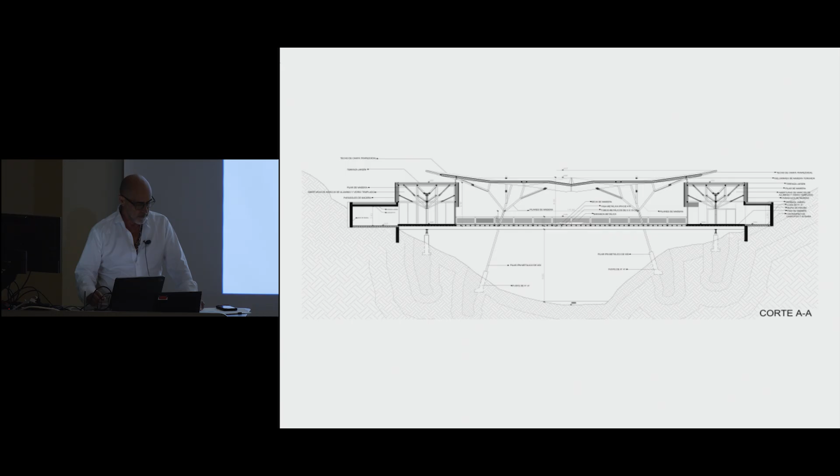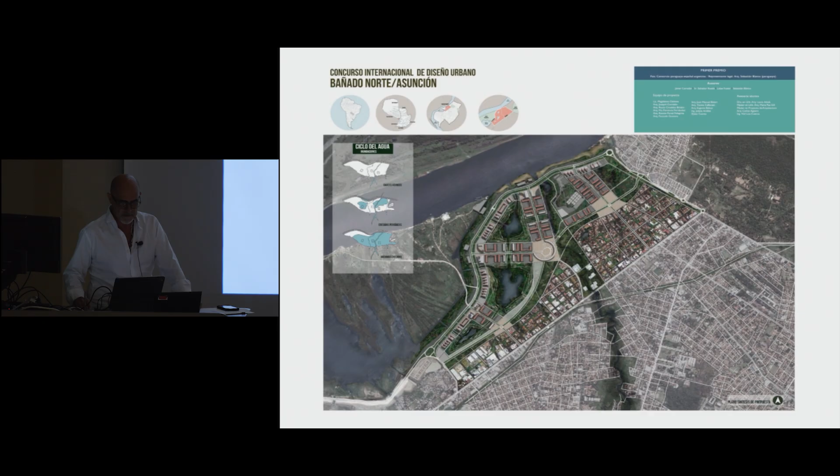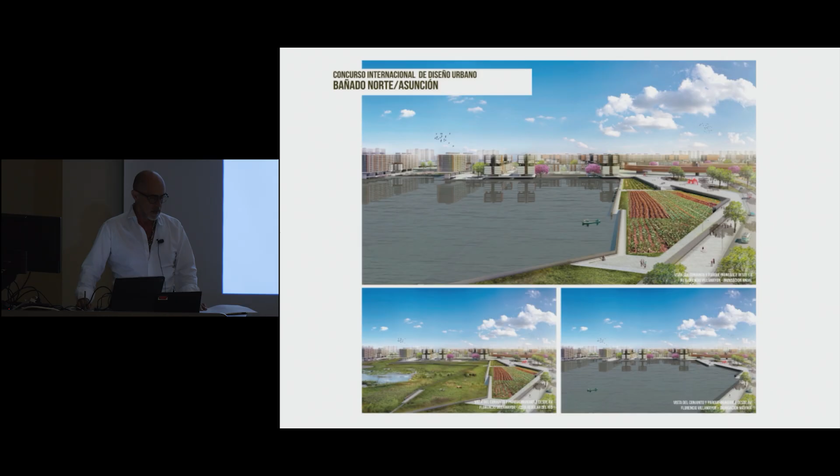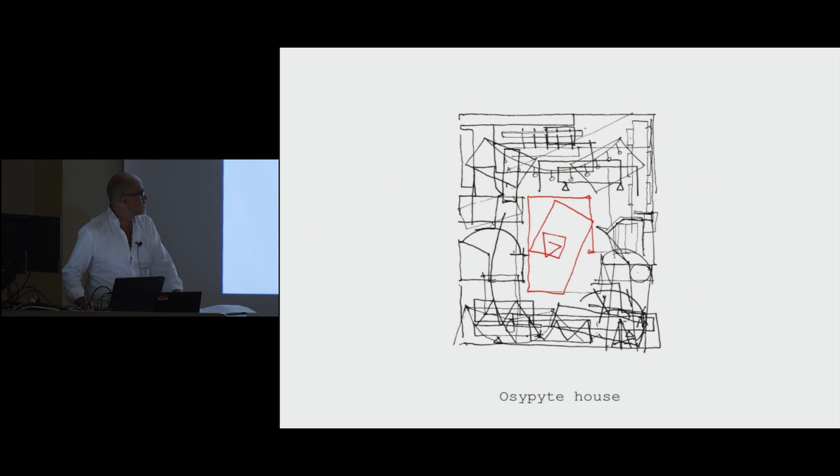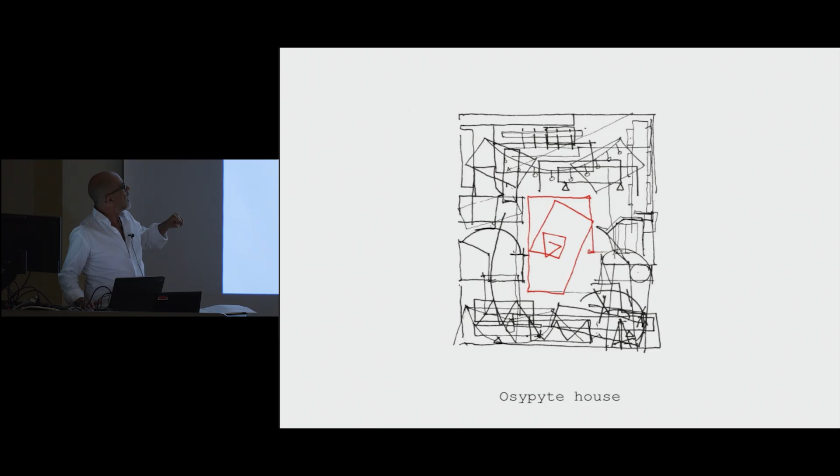This is probably most of the projects and works that we did until now, around 25 or 30 years of profession. So, if you remember one of the first drawings, this is the Osypyte house. This is where I live and where our studio is, the Laboratorio de Arquitectura. This is in the center of the image. And all of the others are the projects that we are going to see now.

Like I said, the tree, this is the structure of the house. A wall of 70 meters without a pillar.

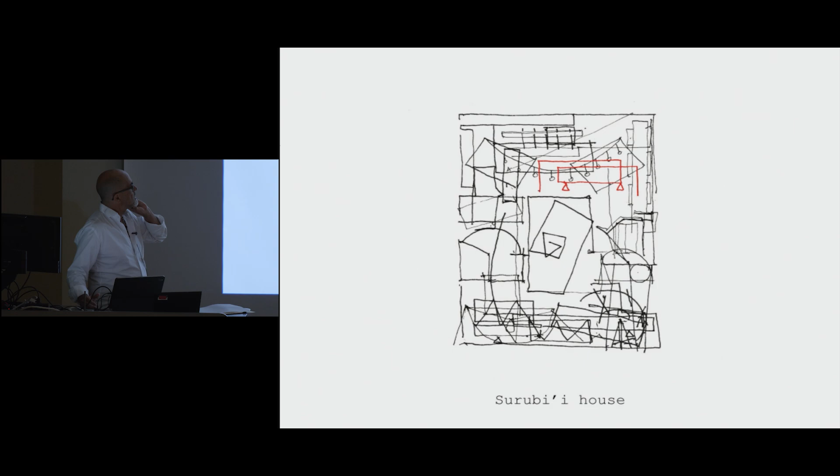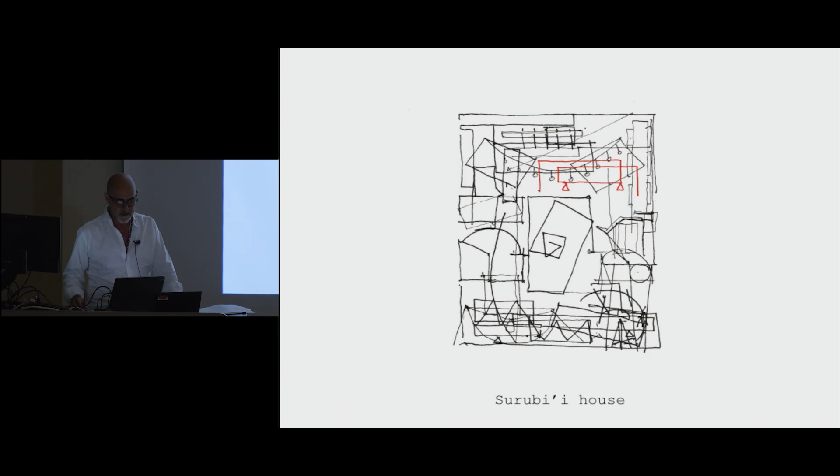Well, this is another house. It's the Surubi'i house. Surubi is the name of the fish, a very typical fish for the Paraguay River. So this house was a house that we thought against how do we think the structure. Just thinking how just a simple beam can work.

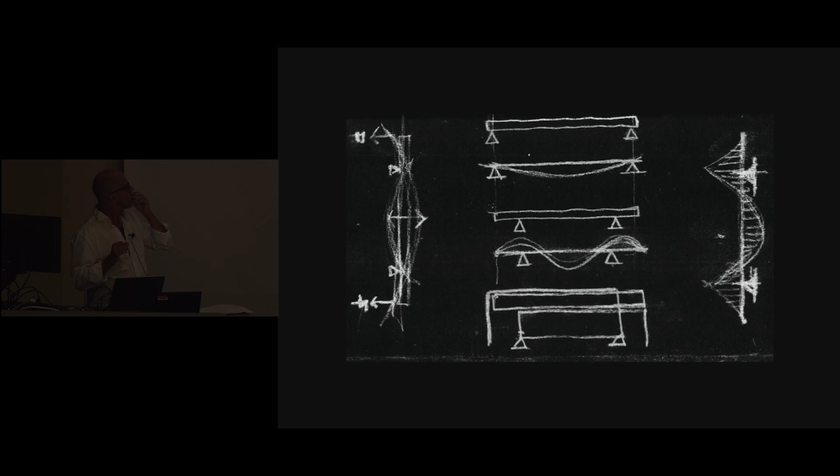You see upstairs a classical beam, and what happened with the deformation of that. But if we take the support to the center, the beam starts to work better. Like this. This is a beam and a weight right on the center. And how it starts. And if the distance between the supports are not enough, we just can put a weight to get the perfect beam for that.

And the weight is the wall that doesn't arrive to the floor, to the ground. This is the main entrance. So you can see here the beam. The support, 4 pillars, and the weight. And this is how it works.

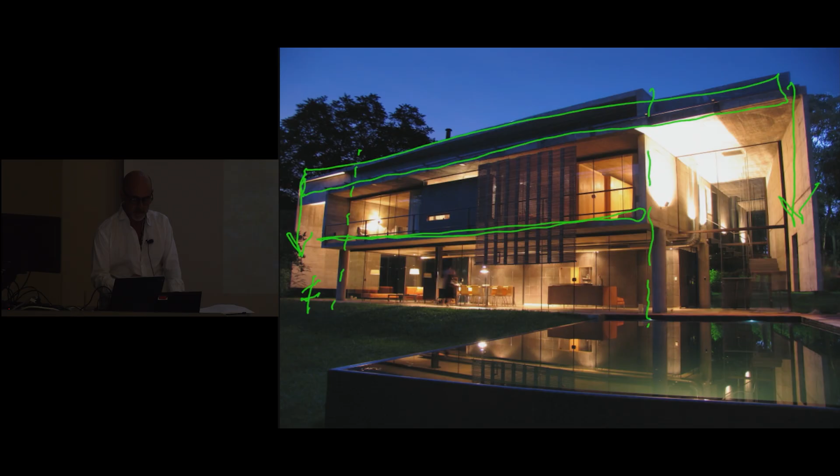All the floor is hanging.

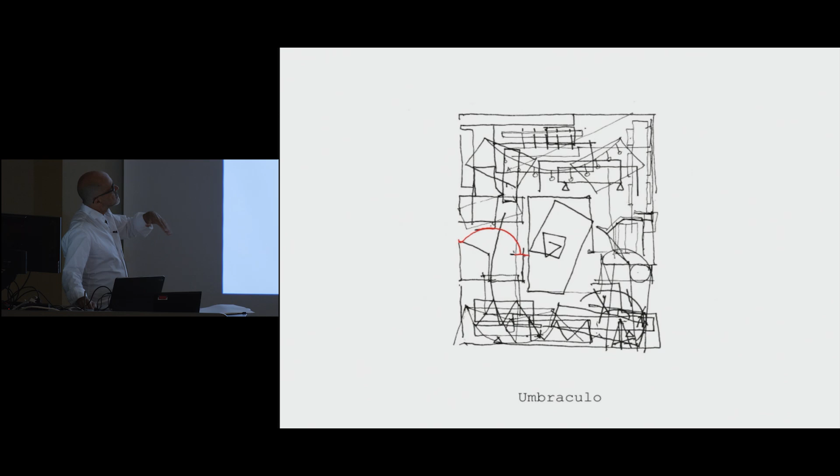Another work. We are going to see very quick, fast, some projects, and then we are going to stop in 2 of them. This is the Umbraculo house. And the problem was just to think how a vault can work.

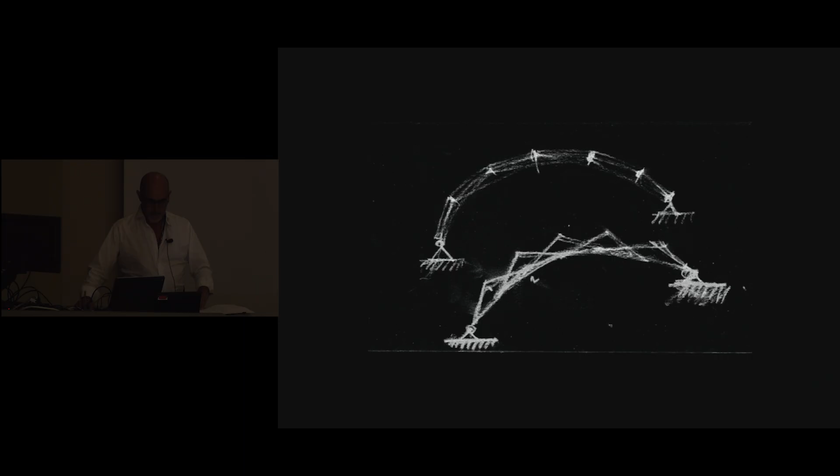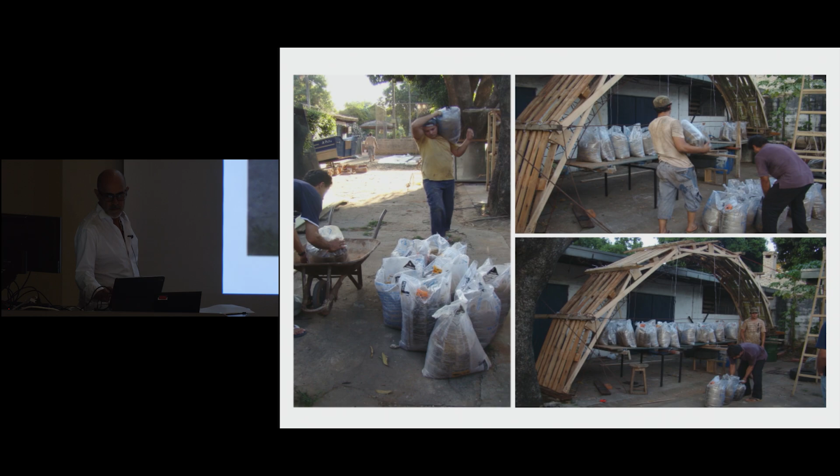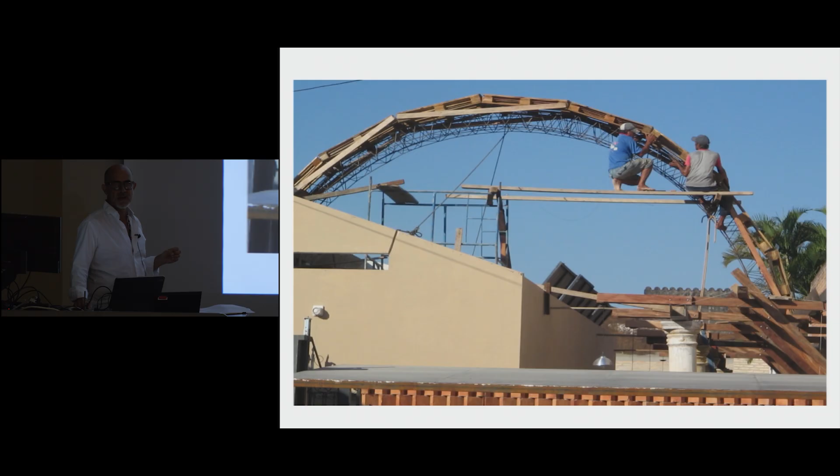But with recycled material. And this is the technique. This was a very old house, a sort of heritage of the downtown of our city. So this is a space that we did on the second level to have a double for the weather and for the sun, just to build a shade.

Filters, double roof. And this wall is black because the owner is a writer. So she can write inside on her wall.

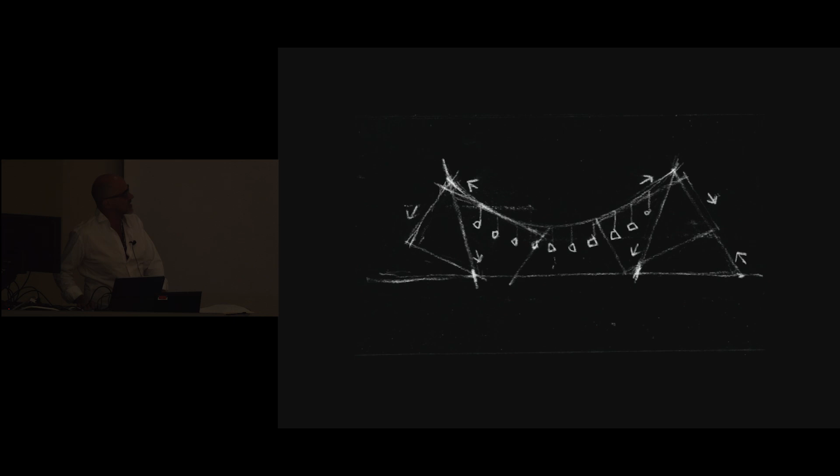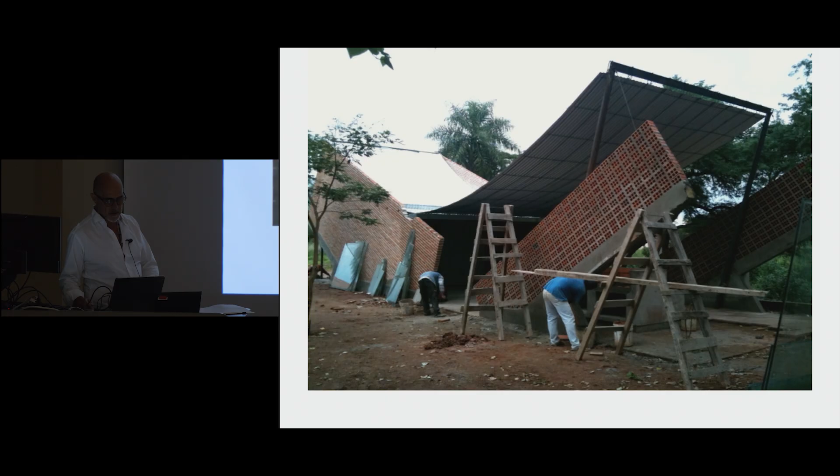This is another one. This is the hammock house. It's a structure for assembling and a surplus of material with construction waste. We have many materials for that. And stones just to give weight for the roof. Very light roof.

The doors are like a garage system. And the most important space in the house, always near the outdoor space.

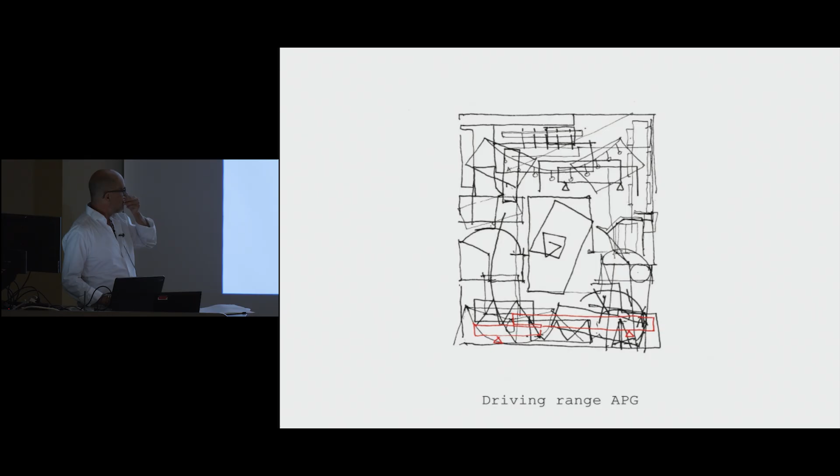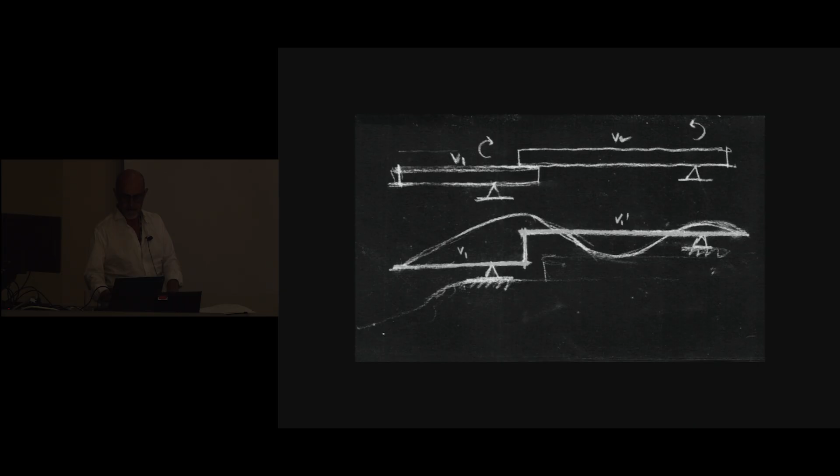This is my son. And this is the idea. And this is how we do variations to know the relation of support and two beams, how can it build different projects? And finally, all the structural calculation to have this. This is the 25 meters of cantilever.

There you have the stream in the dark part, and the topography, the ground goes down. So players can be here. Excuse me, you have one under the roof. Three spaces for the players.

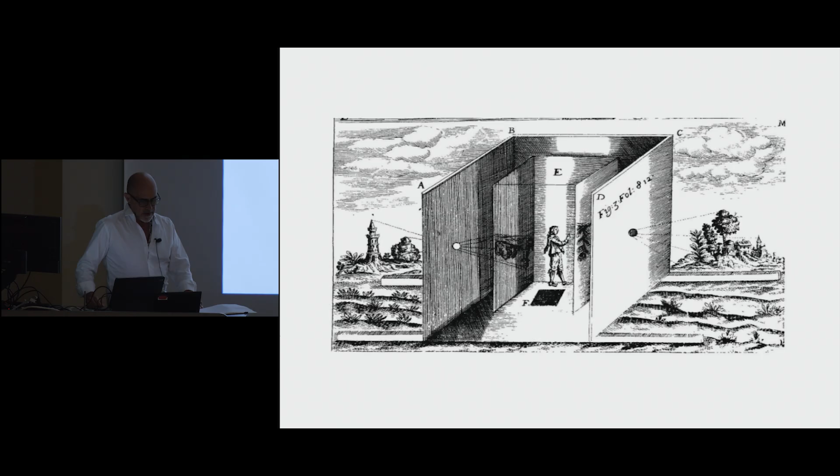Okay, another one, the dark house. Dark house is a pinhole box. Was a house, yes, was a house because now it was transformed into a house for a filmmaker, and how a filmmaker can live in her own chamber was the topic.

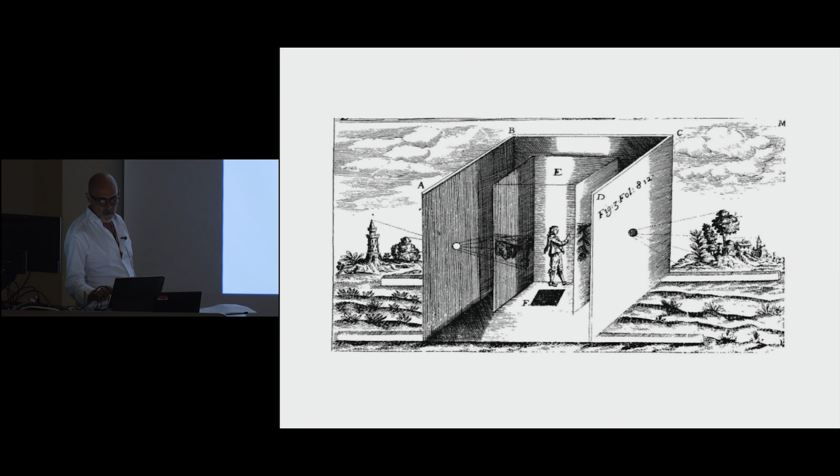This is the very famous film of Paz Encina, the name of the filmmaker. She won a prize in Cannes. This is the way we explain her, because she came to us to ask for a house, since we did the hammock house. The movie was La Hamaca Paraguaya.

We said that she is going to do many films, and the hammock house was not the right house for her. So we thought of another idea. That was our presentation.

We put the hammock, and the image, the projection of that in the landscape where she is going to have her house, was inverted. And it was in this place. These are the plans. It had two levels, and works like this.

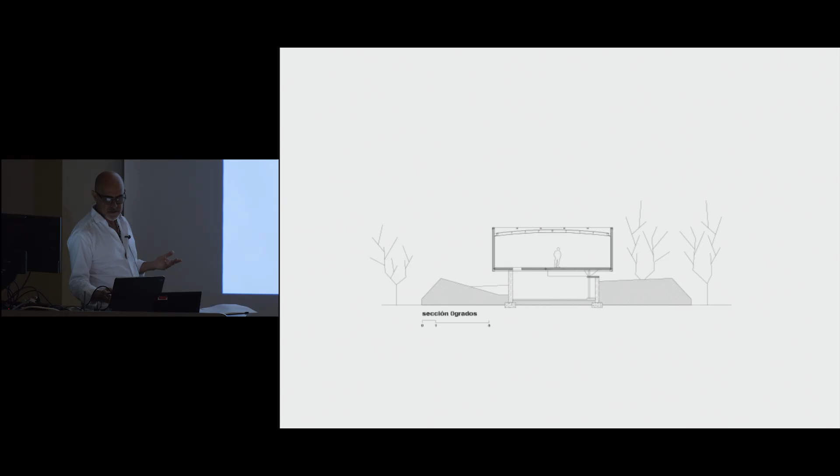When the weather -- why is it a pinhole box? Not just because she's a filmmaker. It's because she was studying in Berlin.

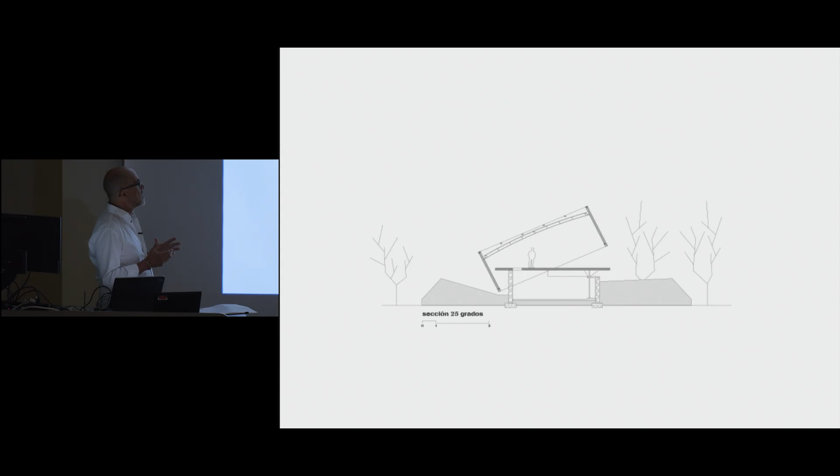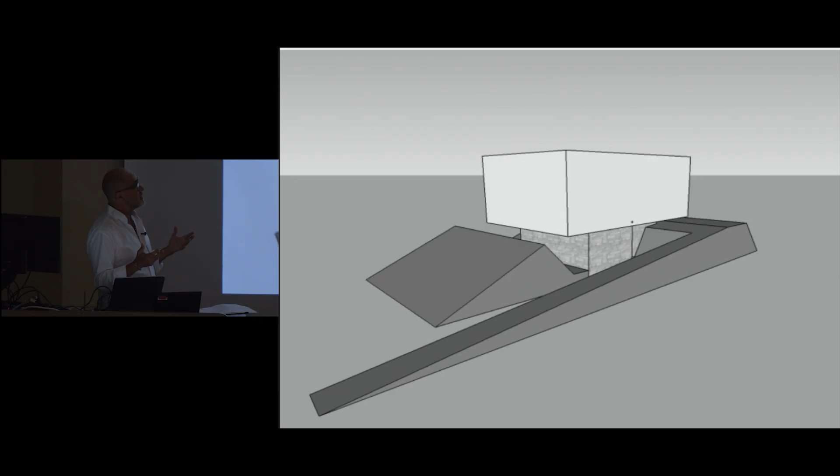She is going to live in this house only two months a year for vacation, so nobody is going to take care of this house. So that was the problem: how to do a house that nobody is going to care for. Also, the budget was only $20,000.

So this was the renders and the explanation of the idea. This is the house already built. She is Pasita. This is how it works when the box is closed -- you can see the outdoor image on the walls, inverted.

So the house is blind, but in some way it is transparent. But it's for a filmmaker, it's not for a lawyer. And this is how it works.

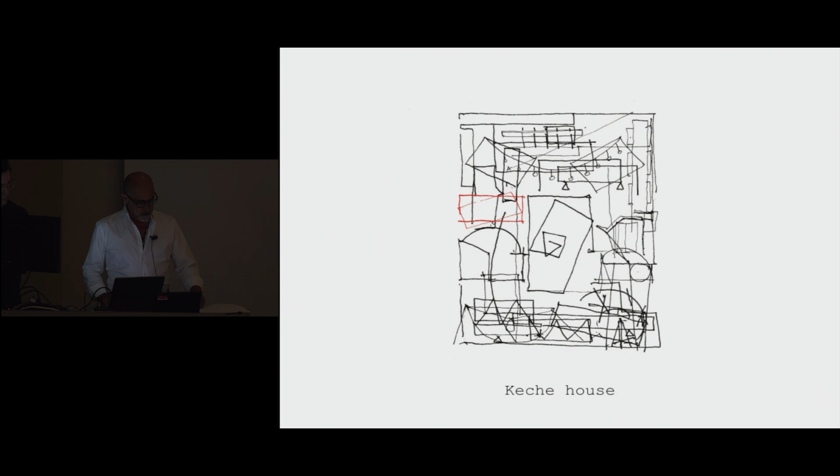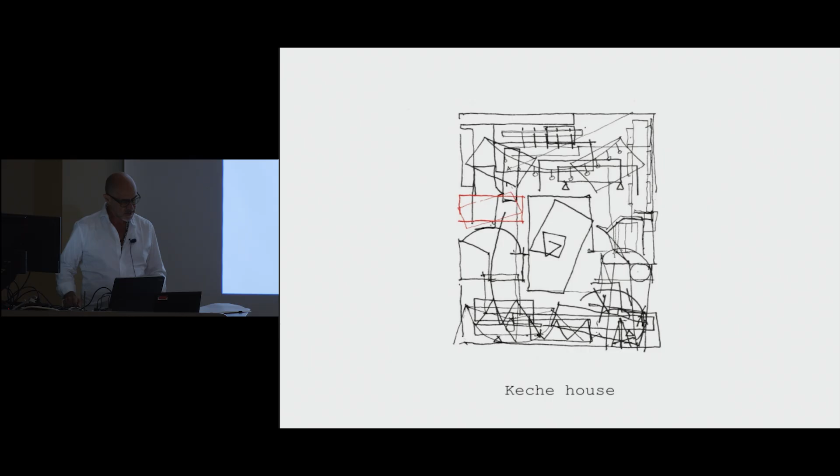Okay, the Keche house. Keche house means crooked house. Why crooked? There is a story behind this. As you know, Saint-Exupéry is the famous writer and pilot who invited Le Corbusier when Le Corbusier went to Buenos Aires to fly on the first flight to Paraguay.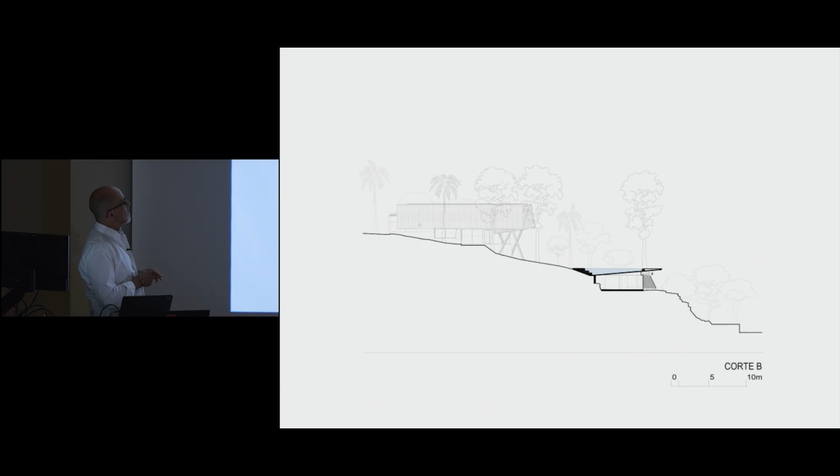So these are the sections, the plans, and this is the house. This is under the swimming pool. That's why I said a submarine, because it's under the water.

And you can go to the house, that is a periscope to see that view. But you see here, this is a beam covered with wood. This is the entrance.

But on the other side, in the other facade, we had the same beam, but one is on the ground and the other is on a support. So this is why it is crooked.

This is the interior space. So in that wall, you have a ramp to go upstairs. Here. This is the other beam, the other wall.

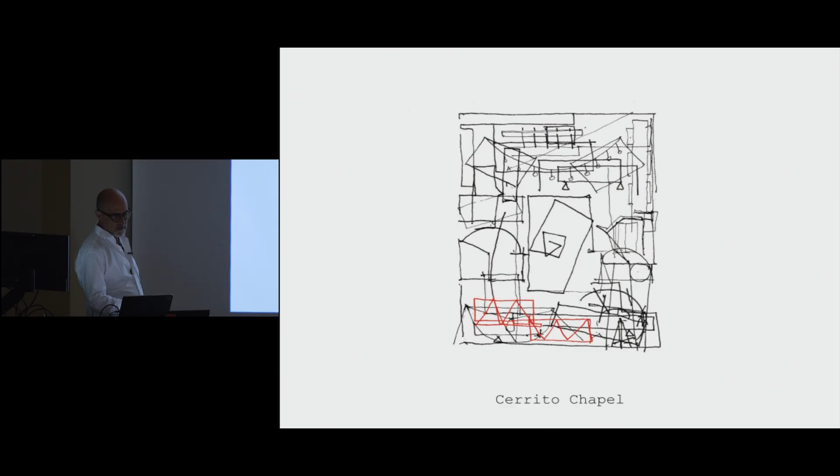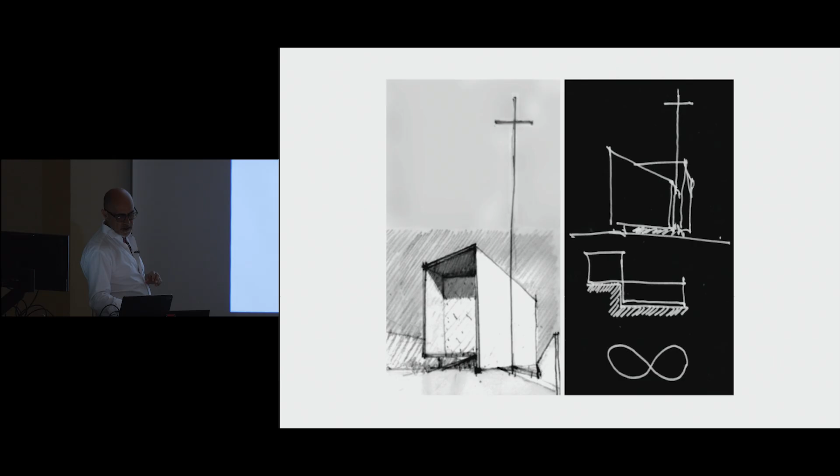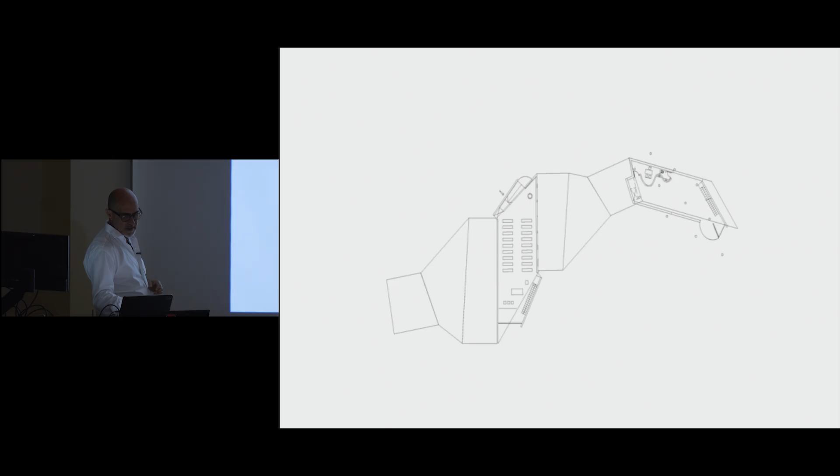The challenge was how to do a bigger chapel, but not with a big volume. So how could be the structure that we can have, in one structure, two volumes? And this is the Moebius strip that gave us the structure to have this.

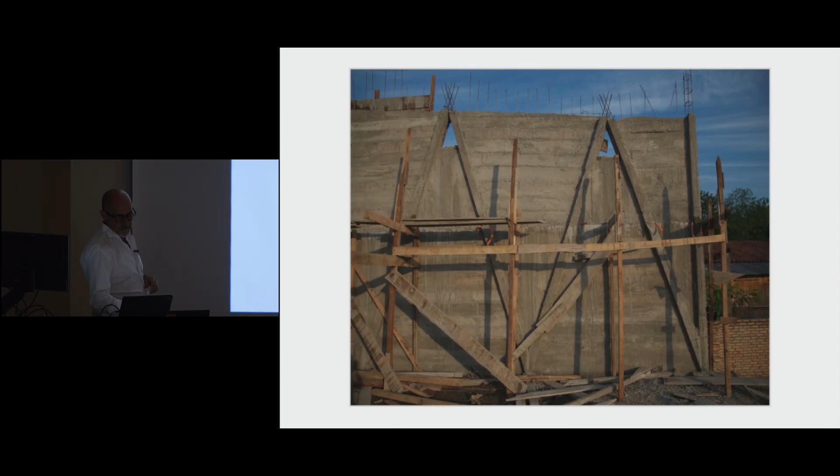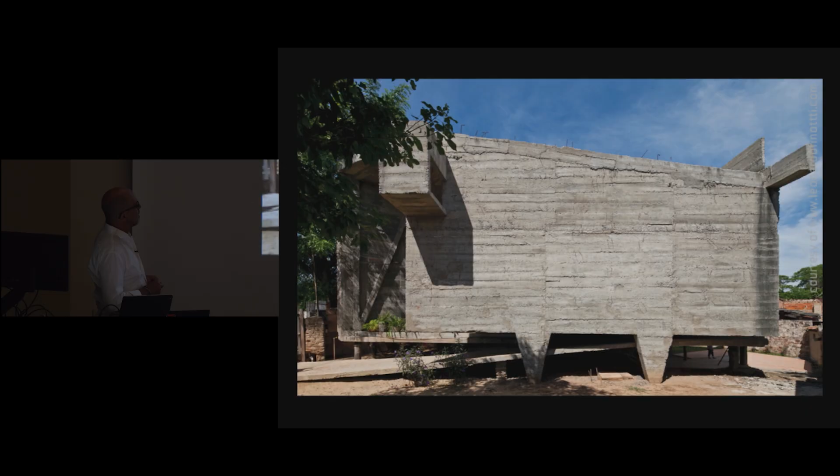The form for this structure was garbage. That's why the garbage was printed on the wall, on the walls, so you can see difference. There were doors, woods, whatever we found was for the form of that.

Was it auto construction? Can we say that? An auto construction experience. And all the structure is just how can we have concrete, because in this neighborhood there was a community of concrete workers. And they asked us to do it in concrete.

And how the situation is, is that it's a very dangerous neighborhood. So most of the chapels are stolen. So this chapel is always open and doesn't have nothing, just... So this is why the curator of the Venezia Biennale said that the Pope chose us to do this nomadic chapel for the Vatican Pavilion.

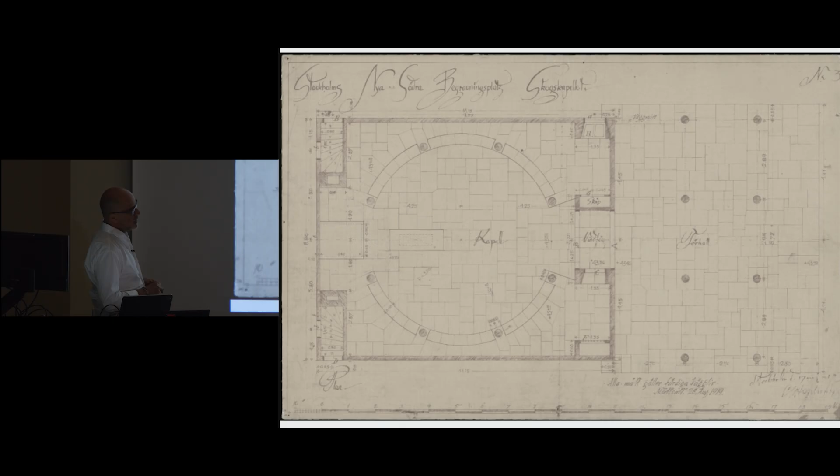And Gunnar Asplund was the reference for all the participants. We were 10 architects. And this is the place that Asplund did, the Chapel of the Forest. That is very known because it's a Nordic house with the Pantheon inside.

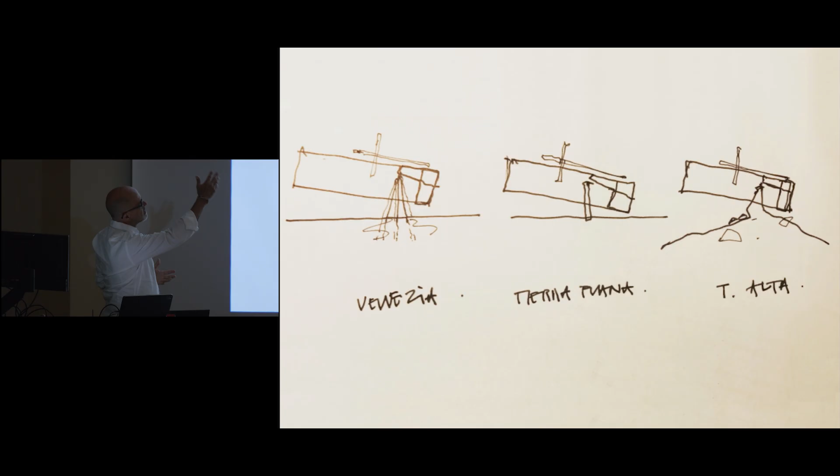So, if this chapel has to be a nomadic chapel, it has to travel. So this bricole is going to be in Venice, in the lagoon, on a simple classical pillar on the flat ground, and on the hill, on the rock. And remembering Navarro Baldeweg and the beer, we did this for that chapel.

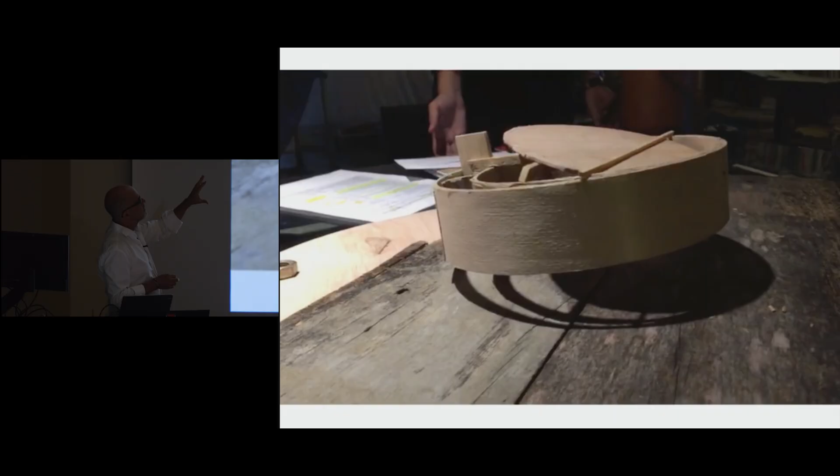It could work for an earthquake. You see, this was the first model, the roof.

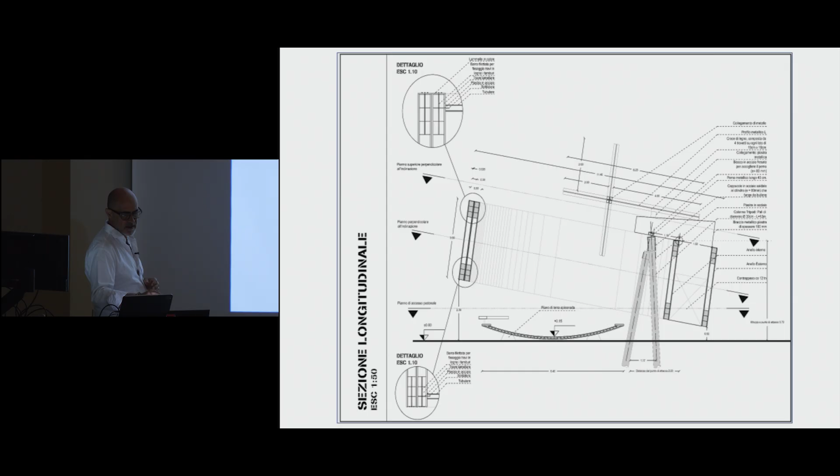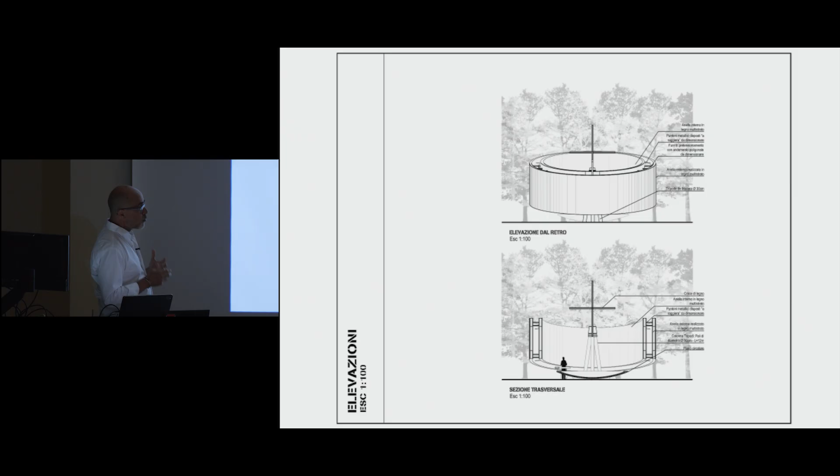These were the calculations for the storm, the snow, the earthquake that an engineer did. And these are the final project. It all had to be built with wood.

This is the model that we used to do in the lab, in the laboratory, in the studio. It's a model that has 70 kilos that works exactly as the structure is going to work. The real chapel is going to have 20 tons in the back to have all the volume on the earth.

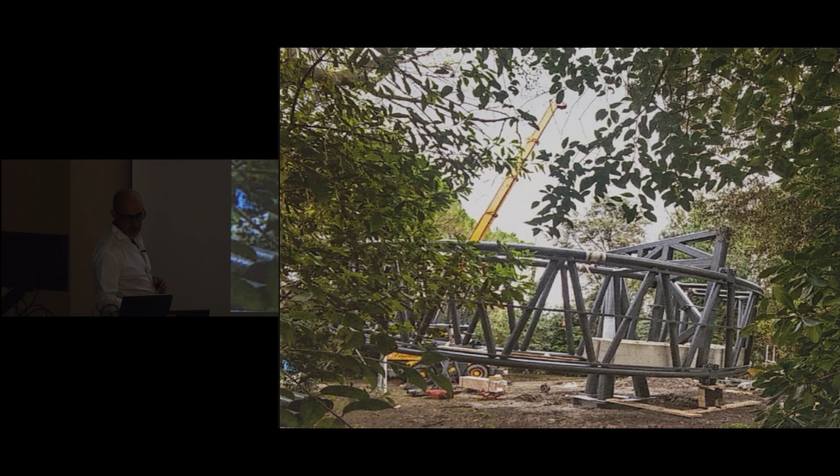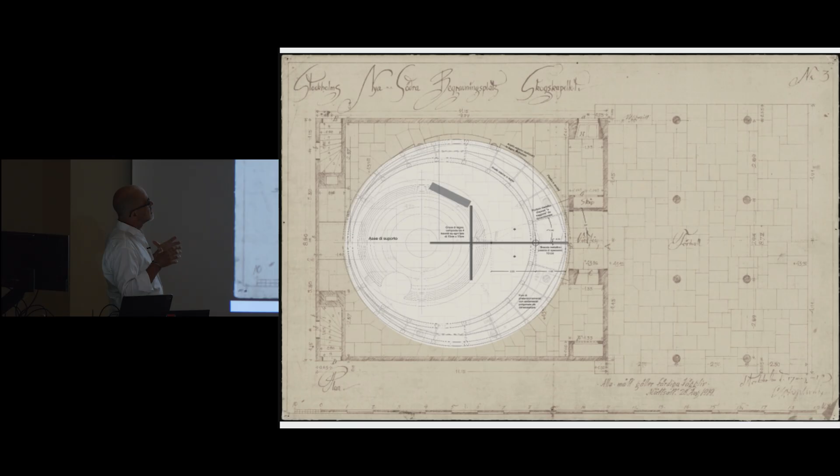But all the chapels had a mecenas, a sponsor. The stone one that Souto de Moura did was a cave, and the other one, but they didn't find any sponsors that could do the wood structure, because the Vatican can't spend money for a festival of architecture.

So they searched for sponsors to do all the chapels, and this was a frustration, because the only way they found how to do it was with the metal structure. So we just give the wood for like a skin for the project.